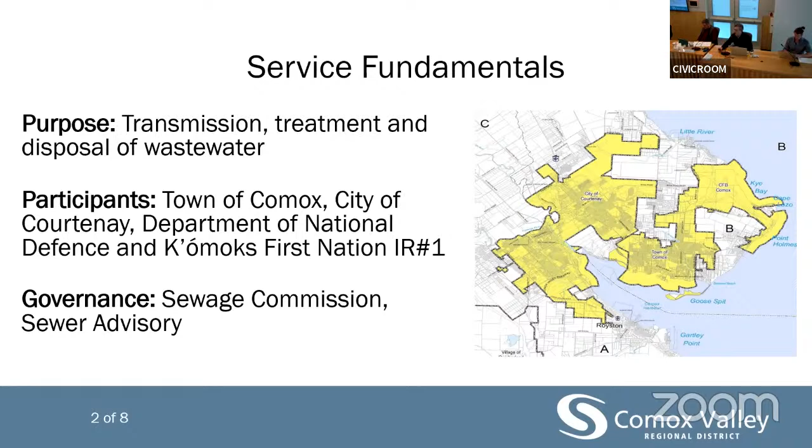Just a little bit of history on the service. Prior to 1984, when the existing infrastructure was completed and commissioned, Courtenay had primary treatment of their wastewater located near the air park, and that primary effluent was discharged to the estuary. Comox discharged untreated wastewater to the estuary through a pipe, since decommissioned, that ran up and over HMCS Quadra and out into the Sound. The DND had a primary form of treatment and then discharged to the Queen's Ditch, where it then flowed out to the ocean.

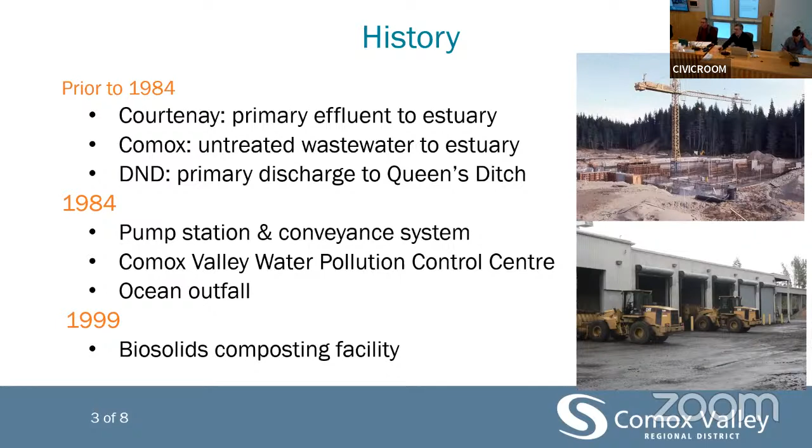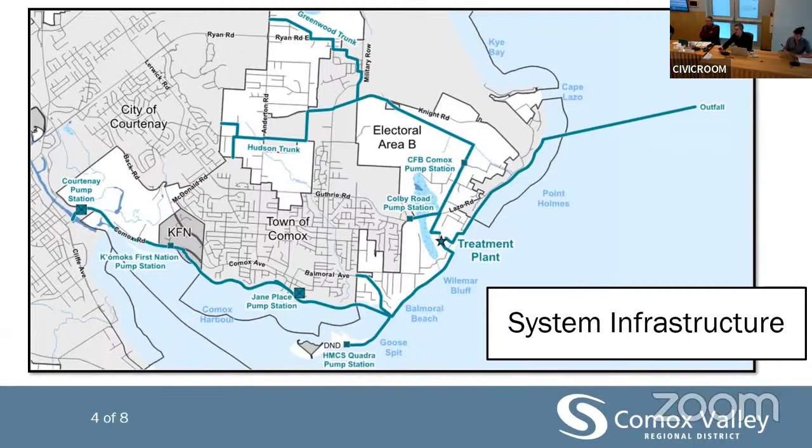Just a brief highlight of current planning work and projects underway. On the planning side, as I mentioned earlier, the stage 2 liquid waste management plan is now complete and will be submitted this week to the province to initiate their review and start that clock running. We're told 9 to 12 months for the review period before we can expect a conditional letter of support, which would provide guidance for the subsequent and last stage 3 of that planning process.

We have a site master planning process underway at the Comox Valley Water Pollution Control Center, with the primary outcome being a schedule for upgrades at that facility to help us meet the anticipated growth of the community. Finally, a DCC study is scheduled for after those 2 planning processes are complete, so we can make sure everybody's paying their fair share of these projects.

An outfall assessment is planned for next year to help us fine tune the timing of replacement for that infrastructure.

Big projects on the go right now: the sewer conveyance project dwarfs them all and is keeping us very busy. Charlie Gorel will be providing an update on that project later in this agenda, so I won't get into it here. In addition to that project, we have the rehabilitation of one of our secondary clarifiers this coming year, and a major priority of continued implementation of our asset management plan for this service.

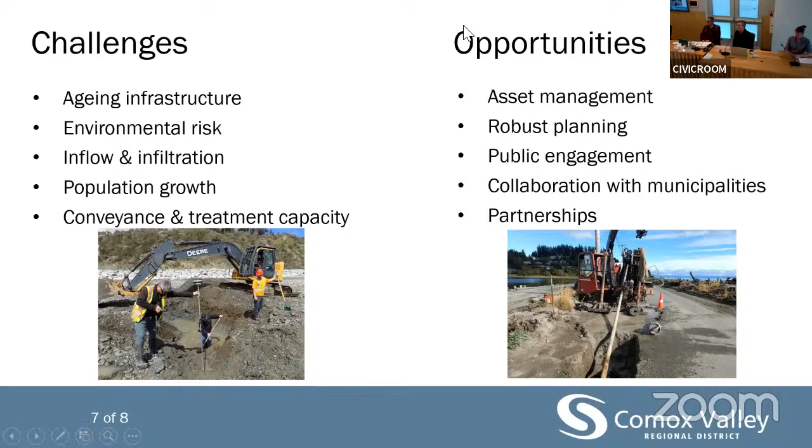Thanks, Chair. Yeah, I actually had a question about the explanation you were giving around DCCs, and you were explaining that we have the same charges whether it's within the existing service or an expansion of it. Is that required under the legislation that we charge DCCs under, or is it possible to have two levels of DCCs depending on whether or not it's within the blueprint of our existing infrastructure versus expansion of it?

Yeah, the legislation does not require that the rates be the same. Although I didn't mention that in the case of the potential expansion into Area A, there was also, given that it was a new jurisdiction participating in the service area, a consideration or an injection of funds from a contribution towards the non-depreciated value of the sewer service assets. So that was something that was negotiated at the time.

So when you're looking at the development in the south, it's a combination of that amount that's already been paid, and the capital improvement cost charge that would be paid by unit. There was approximately $500,000 coming in from Area A for their anticipated proportion of the total as a share of the non-depreciated value.

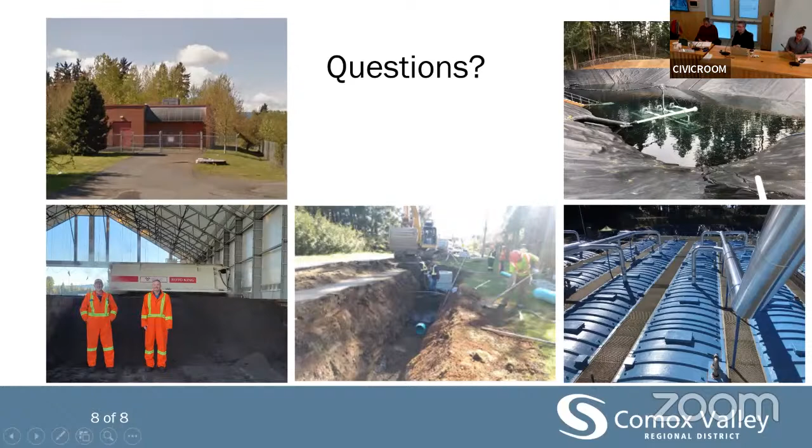Thanks very much for that. Further questions or comments from commission members? Seeing none, is anyone opposed to receipt of the orientation?

That is carried. We move on to item number 4, the sewage system conveyance project updates. We have a report dated December 1st regarding a description of the sewage system conveyance project, an update on the project status, and a recommendation to apply for grant funding for receipt.

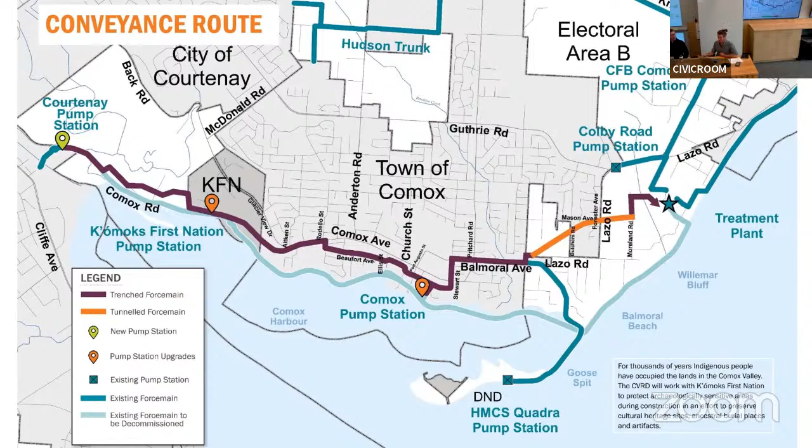You have the new roundabout up at Glacier View Drive, which is where our force main will be coming along Comox Road as it transitions into Comox Avenue. And then another new roundabout down at Rodello, and that's where the force main is taking a right, a southerly turn down Rodello around the new development that's there. So that'll be 2 of the major surface improvements in Western Comox.

There's also some street improvements on Beaufort Avenue down near City Hall, and some more up on Balmoral Avenue and around Brooklyn Creek as we get towards the eastern end of the town there. So those surface improvements are being collated into our detailed design for the force main project, and will be tendered to one contractor so they can do it all at the same time, and there'll be a lot of cost savings and time management savings for both organizations in getting those done together.

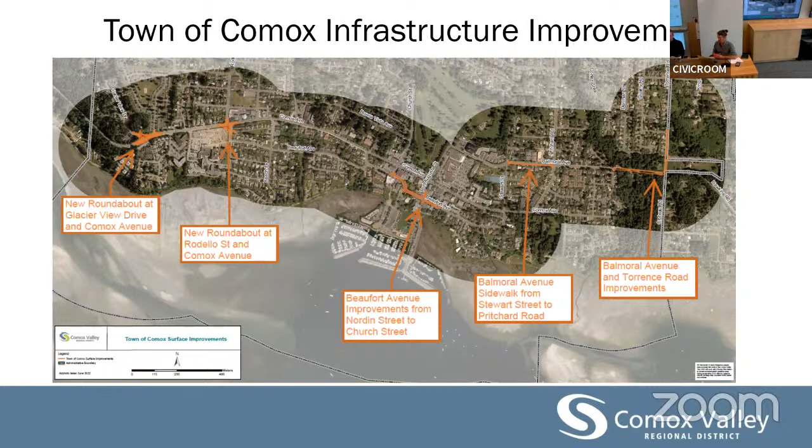As part of the cultural heritage permit that we have received from the K'ómoks First Nation, we are currently going through a phase 1 archaeological investigation to confirm the route that we've chosen for this project.

For those that live in the town of Comox, you will have likely seen our drilling rig out on Beaufort Avenue right now. We're drilling 3-meter deep augers every 30 meters to really prove out our hopes that there's no sensitive archaeological information within that zone.

Once that's completed, the rig will be moving along to Balmoral, down Jane Place, and then back towards Bayside, where we'll be doing a series of augers to complement the pits that we've already dug through the farmlands to really quantify any archaeological materials that are on the route of the project and make any necessary adjustments at this stage to avoid them if possible, and if not, to be prepared when we do come through to manage that archaeological material.

Some really positive feedback: the work we've done to date, we've found no sensitive materials, and that includes some continuous trenching along the boundary of IR1, the western boundary, where the pipeline will be coming down. So it's really positive, and we're hoping for continued good news through that program.

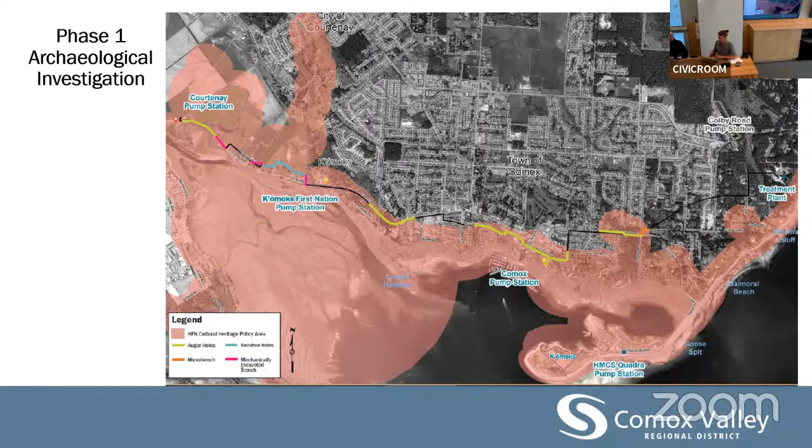So we're very busy fine-tuning all the details for both contracts right now. In the spring, that'll be when we have a lot more information for the commission about who, when, and how the project will be implemented. That will trigger another major round of public information campaigns, talking about the details of the traffic management strategy, which I'll be presenting to you in a couple of minutes. So that's the extent of my presentation today, but very happy to answer any questions that come up.

Thanks very much, Charlie. We'll start with Director Wells. Thank you, Chair. And I know it's coming up later on in the agenda, but you had pointed out very focused on the grant, which is very exciting, especially on a project of this scale. I just wondered if that grant will be conflicting with any other grants that other municipalities in the Comox Valley may be applying for as well.

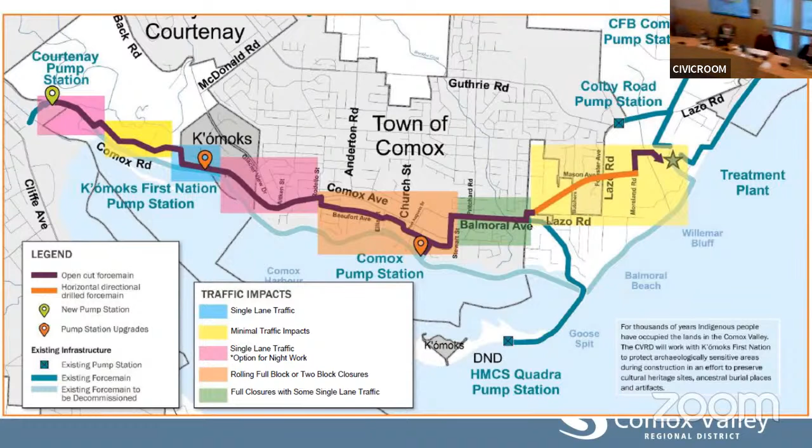Okay, so might residents anticipate a week or two weeks, or is it unknown at this point? We don't have the when and for how long at this stage, but we design these projects so that the vast majority of the work can be done during the day. We're not setting up this project as a large night work project—we can't afford that kind of project. So it's our mandate, as we try to fight that battle between keeping things open for the public and keeping good access for our contractor, to make sure they're encouraged to do the vast majority of the work during the day, and it will be isolated pockets where they select to do night work.

Charlie, I'll just ask, do we know how many people will be working on the project, where the staging area will be, and if there'll be any issues around parking and that type of impact on nearby residents or businesses?

Well, it's a big question—there's many facets to that question. We don't have exact numbers. I think we can look to previous large projects we've done and seen that, even with a large work crew, you can see the vast area through the valley that this project takes up. So you can imagine there would be a parking area set up at the Courtenay pump station for the structural crew there. But the majority of the work through here is a line crew, working with excavators and pipe installers—that's actually quite a small crew. They're not going to be large crews working on our streets, so I don't imagine there'll be huge parking issues.

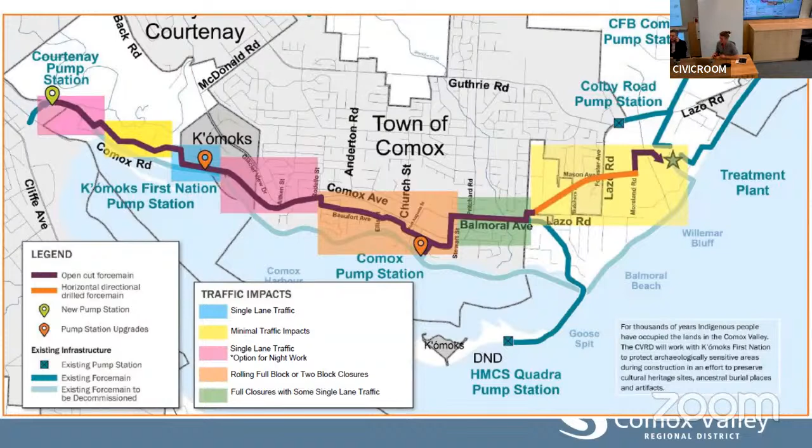So as I mentioned, the Comox Road is the long linear corridor that really creates the complexity for this project. With technology, we're able to analyze the weekday flow running along Comox Road. From about 6 a.m. it starts to ramp up, and from about 8 a.m. in the morning till 6 p.m. in the evening, we're looking at about 1,000 to 1,400 cars in total running east and west combined along that corridor.

Even in a very short length of construction, at 100 meters of construction area, you only have a capacity of just over 400 cars an hour. That's just not going to be sufficient for the Comox Road corridor. And 100 meters would be a very short length that our contractors would cry foul about and would have to add a lot of costs to their construction.

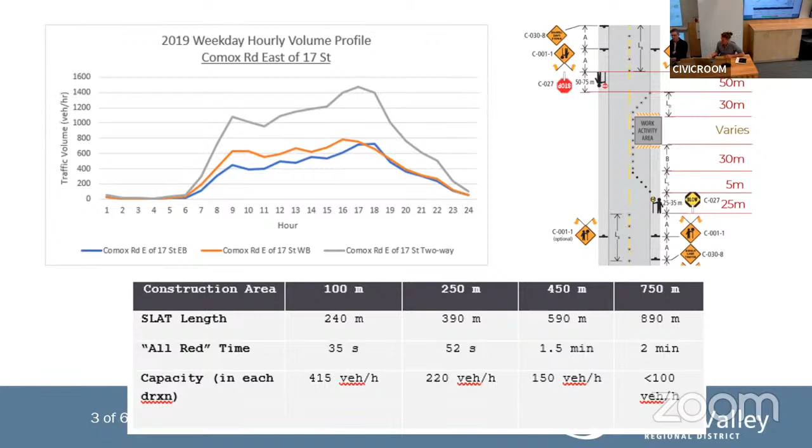Now, there are important parameters when thinking about unidirectional flow on a major corridor like this, and the first is emergency vehicles. Emergency vehicles have to have access through construction sites at all times. So regardless of how this unidirectional flow is set up, it would likely be traffic light systems that emergency vehicles can instigate to ensure they can immediately close down that road and access eastwards. So there's no concern about ensuring our emergency vehicles have the quickest route to any emergency that exists.

We do acknowledge that this is going to impact several transit routes, and we're working closely with BC Transit and our transport staff here at the CVRD to quantify those and prepare rerouting of some of those routes. There are 4 bus routes impacted, some in minor ways, for example where we're constructing on their turnaround route in downtown Comox. So we're putting constraints on our contracts that our contractors need to keep one of those turnarounds open at all times. But some of those bus routes travel along Comox Road, and we're going to need to do some detour routes for those. We're working through that analysis to make sure those detours are well quantified and that alternate schedules can be provided well in advance.

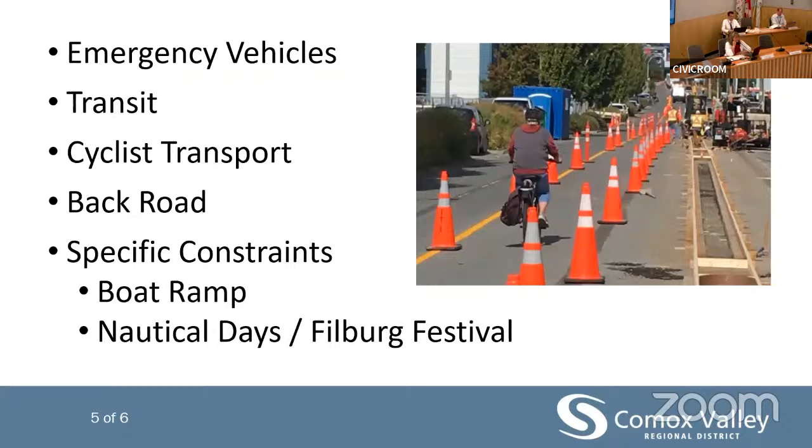No worries. I guess I'm heartened by the idea of being able to tweak it. My concern was around, I'd never considered the unidirectional piece, but I'm looking at where in the yellow at the beginning of it, and partway down Comox Hill we have Emerald Shores, which has a bunch of people living there. It also looks like it would encompass the whole Manor Drive area. I'm wondering, if you did go to that unidirectional flow, if those people would have some ability to come out and go into Comox without having to go all the way around.

Yeah, so it's a good question, and one that we've looked at in detail. Thankfully, the Manor Drive folks pop out just upstream of Glacier View Drive, and once they leave Manor Drive, they pop out onto Glacier View and come back into Comox. The Emerald Shores folks are a bit trickier, and it's one of those devil-in-the-details kind of locations. We are looking at a way to try to make sure that they do have a little bypass to get back onto Glacier View Drive, so they're not going all the way around.

But what we need to remember here is that it's not just those folks. We have a lot of residents that live along that yellow line who are going to be impacted by this, and we can't have people out there signaling, working at the exits of each of these residents to give them special case to go back against the flow. So we are looking at exactly those residents at Emerald Shores and trying to figure out how the signage would work.

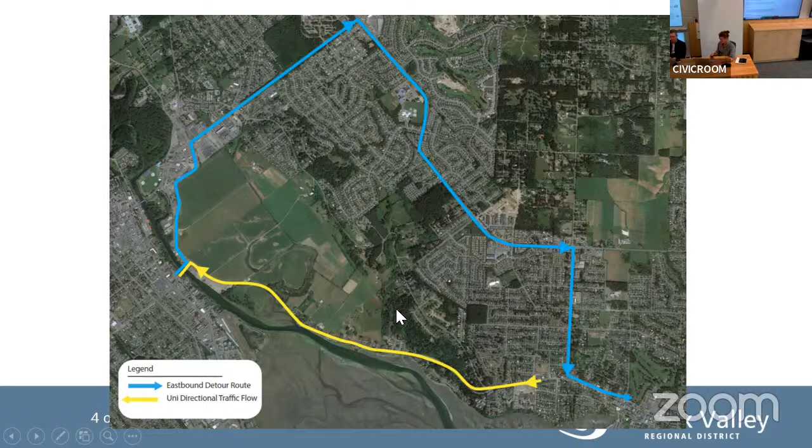Is there anyone opposed to receipt of this item? That's carried. We have one final item on our agenda, the sewage service fees and charges bylaw update report dated December 1st, for receipt.

Moved Grant, seconded McCollum. Any questions for staff presentation? Just a brief by Chris LaRose to outline the purpose of this for you. Thanks, Russell, and through the chair, just very briefly, this is a brief report.

It recommends an increase to the septic receiving fees, or septic disposal fees, in line with the projected increase in the municipal requisition. Our practice over the past several years is to keep those rates in step with the municipal requisition, so as costs increase to municipal residents, they also increase to users of the septic disposal service. Those are proportional increases for the next three years.

The second piece to this report is a recommendation to adjust the way that we bill for Skyrocket. Skyrocket is the finished product from our biosolids composting process. It's proven, over the past few years since our upgrade to that facility, wildly successful, and we are typically sold out of that product a couple of weeks after we finish a batch, which leaves us most of the time without any product to sell to members of the public who come looking for it.

At the same time, our costs are escalating, so we thought there's an opportunity here to adjust our rates a little bit, both to remove the highest volume discount, because most of the product actually gets sold to companies who mix it with their own product and resell it. So we're proposing to remove the highest volume discount to make a little bit more available to our residents, and also, similar to the septic disposal, increase the unit rates a little bit. That combination should help to offset a larger share of our cost of managing the solids stream from our operations. Happy to answer any questions about that recommendation.